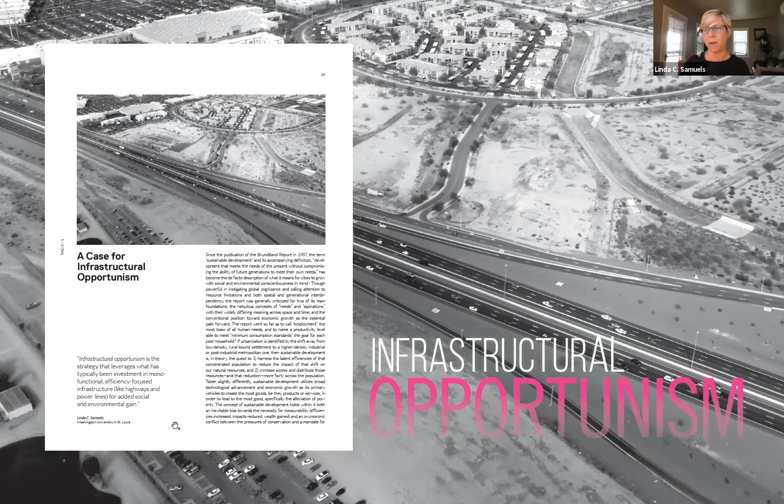So if we have these opportunities, one of my big questions is really, why are we building infrastructure like it's 1956 or even 1976 still, when it's almost 2022? We are on the verge of investing billions of dollars again in infrastructure as it continues to become obsolete, as environmental challenges intensify, as social inequities persist and widen.

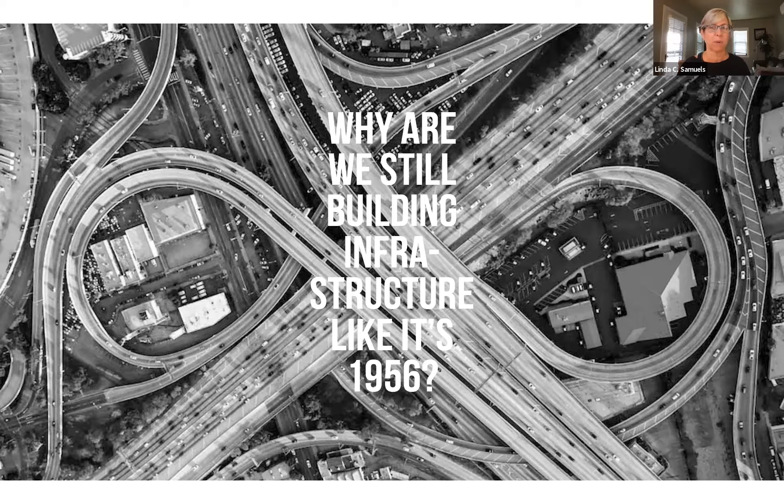And we have to design better infrastructure, but we also have to design infrastructure better. So my question is, how do we go from last generation infrastructure, which is resource intensive, spatially and socially disruptive, and almost always does one thing at a time, and sometimes not that one thing very well, to next generation infrastructure, which contributes to the reduction of these damages and divides.

It reintroduces systems-based thinking into city design. It recognizes infrastructure as a public amenity, and it utilizes all of our interdisciplinary skills as designers and thinkers, regional thinkers, macro and micro thinkers, to improve the quality of experience and the quality of life for all who use it, human and non-human alike.

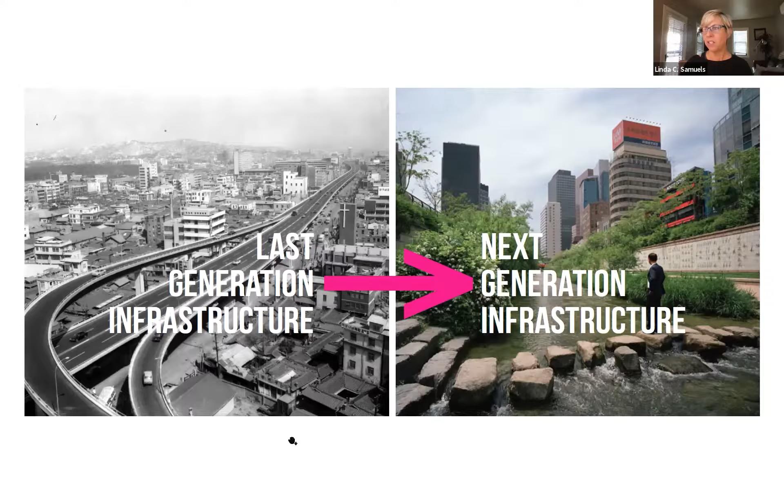So part of the book that I want to share with you today is two of the primary case studies that are included in chapter 4. And I remember that chapter because it was one of the hardest chapters to finally get done. These two case studies have pretty significant contrast in terms of geographic and demographic conditions.

One of them is the Interstate 11 supercorridor, which is the stretch of interstate that is potentially made up of a couple existing interstates with a couple new components. It's about 500 miles of proposed interstate, and it connects, in the big picture, the port at Guaymas, Mexico, all the way to Canada. So it's technically a Canamex corridor.

But the section that we looked at was really the primary focus section, which runs from the southern border of Arizona to Las Vegas. The reason that piece in particular is so important is Phoenix to Las Vegas are the two largest cities in the US that don't have an interstate connecting them because they were not large enough when the Eisenhower map was originally drawn.

The other case is significantly smaller, and it's a little bit different because it focuses more on the social aspects than the environmental aspects. That's in St. Louis, Missouri, which is in the central US on the Mississippi River. That is about 17 miles of Metrolink light rail proposal that would connect the southern part of St. Louis through central St. Louis to the northern part.

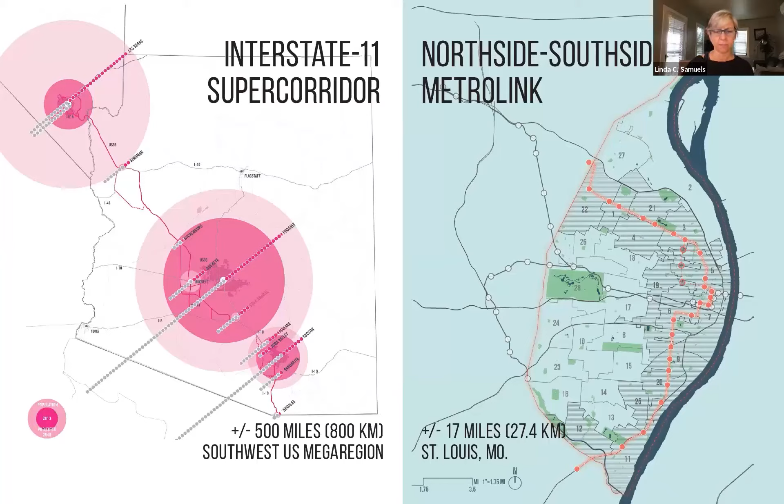So the question is, how do we actually change these infrastructure models from past models to future models, or from last generation to next generation? Sometimes I call this going from the red arrow to the green arrow scenario.

And I have thought about these three strategies. The strategies are broadening the process, transforming the prototype, and measuring what matters so that we can shift the paradigm. I want to talk a little bit about each of these.

Broadening the process is really about incorporating a wider range of stakeholders early on in the process: designers, planners, ecologists, hydrologists, people who might not be thought about in the very earliest stages of infrastructural planning. Working across agencies and really spreading power to the people who are most affected, the local residents.

Transforming the prototype is really about the physical objects. How do we stop designing these physical objects based on some sort of status quo idea of what they should be, moving away from models that are obsolete or unsustainable, and seeking bigger goals beyond efficiency of service? I think we do that by incorporating next generation infrastructure criteria.

And then measuring what matters means that we've got to stop thinking about growth as the only solution, as the only measure of success, growth for the sake of growth. We have to differentiate good dollars from bad dollars. And we have to also recognize the cost of loss.

So air pollution is a loss, and we don't account for that loss when we're talking about a bottom line dollar success. We also have to account for the value of social gains. So volunteering, working in the home, these things have never been given the kind of value they deserve in terms of measuring success.

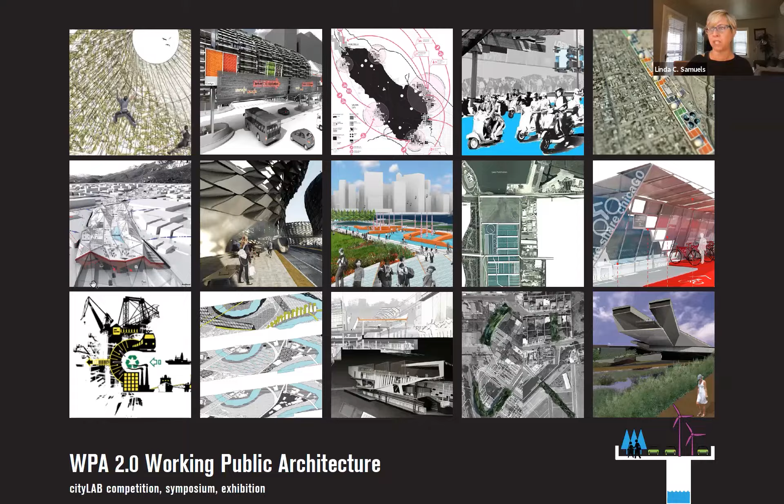This competition attracted about 320 entries globally, and I looked more specifically at the top tier, the 15 finalists and the winner. What you see here is an image from each of the 15 finalists, and these are covered pretty thoroughly in the book, and the names might seem a bit familiar if you've seen recent publications.

Almost every finalist has produced work since the competition—it's been 10 years—that had seeds in their entry to the competition. So they've taken these ideas of next generation infrastructure and are continuing to practice and expand them.

The winning project is by Port, just to give you some glimpse into the project that took the prize. It's called Tunnel Algae Park, and it was an idea that by creating a bridge across the tunnel that connects Manhattan to Governors Island, you could capture that CO2.

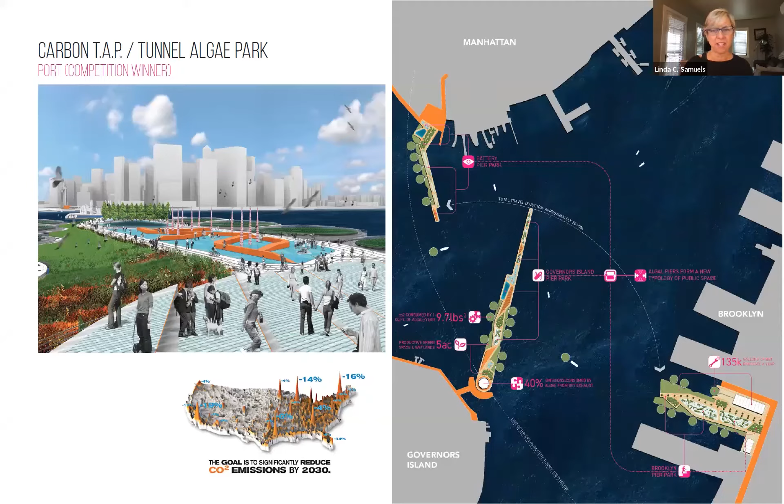You could turn that CO2 into algae, and take that algae and turn it into alternative fuels. At the same time, you would be providing public space, and you would add an option to connect these 2 parts of New York through better biking and pedestrian activity. So you can see how that begins to think about what I'm going to show you as next generation criteria.

Next generation infrastructure is multifunctional, right? It is no longer enough to invest all that money in something that does only one thing. So everything has to do more than one thing at a time, preferably with relationship among those systems.

It is public. So it is not just about public funding, but about providing public space that is inclusive, engaged, and supports difference. It is visible. Part of making our resource use more visible means that we are personally accountable for how we use resources, but we are also more accountable as a collective to how we use the commons.

Next gen infrastructure is socially productive. It increases rather than decreases equity. It provides new amenities, access, and opportunities while hopefully decreasing negative impacts. It is locally specific, flexible, and adaptable.

So next gen infrastructure can't be obsolete in 10 years or 15 years or even 50 years, but it has to be able to change over time, adapt to people and technology, and accommodate climate disasters that we know are coming. It is sensitive to the eco-economy.

So next gen infrastructure recognizes its interconnection of economic and ecological systems and prioritizes reuse, recycle, revitalize, or reinvent. It is also driven by design rather than efficiency only, so it can become design prototypes or demonstration projects, but it is an opportunity for designers to engage quality of environment, aesthetics, and actually sense of place.

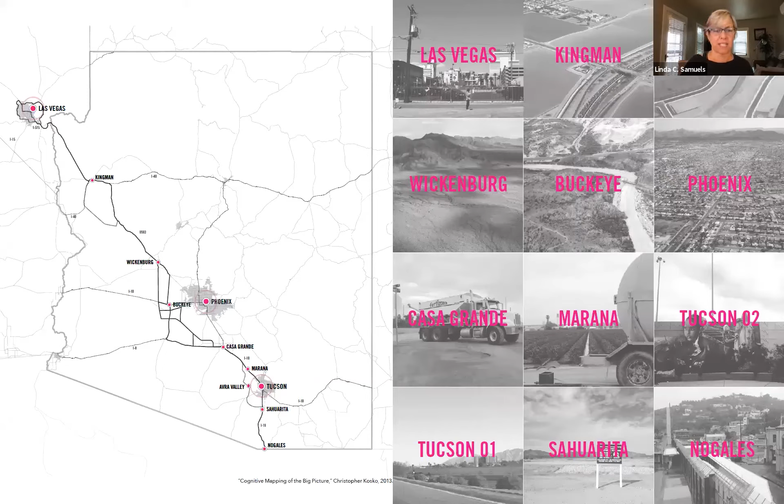One of the reasons, though, that this freeway was being proposed was obviously for economic development, but also the argument that more lanes is always necessary. We've proven time and time again that more lanes do not solve congestion, but in Interstate 11, that was a big part of the argument. So we wanted to start by debunking that argument and saying more lanes are not going to solve the problem here, and more lanes are not going to give you the economic development that you're looking for.

So we developed sort of three really basic ideas that said, okay, if you do these three things before you do even any other design work, they will offset a lot of the carbon emissions. So design for high density, multifunctionality, and multimodality along the whole route.

Second was to shift 10% of the freight from truck to rail, and that would increase inter and intra-city commuter rail in addition, according to ADOT's existing projections. And then the last one was to just shift an additional 1% of vehicles from gas to electric. And all of these things were already in the process.

ADOT was already studying these things, but we added up the numbers, as you can see on the right of the screen. Can't miss that yellow. If you just did those things, you would save 2.1 million metric tons of CO2 before you did any additional design work. That's about a quarter of the 2+ million new anticipated residents offsetting their greenhouse gas emissions. So we started there by saying, do these three simple things first.

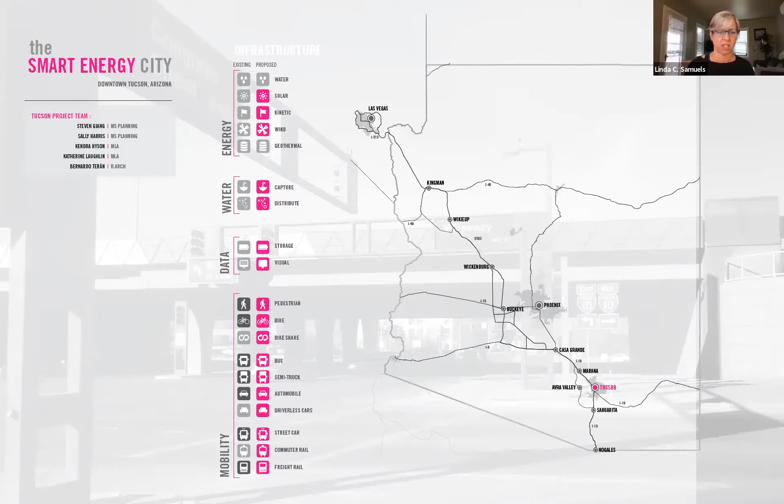The two projects I want to show you, one is this project called Smart Energy City. If you see the two columns, the gray column of existing infrastructure on the left is what is evident now in terms of resources of water, energy, data, and mobility. The column on the right, the hot pink, shows where each infrastructural resource has been enhanced through the design project you'll see. So the design project for this site was a response to the specific condition here.

A little bit of demographic information: Tucson at this time was the 6th poorest city in the US. A little over 20% of the population was below the poverty line. But Tucson is what I call an infrastructural adolescent city. It's starting to make some changes by building streetcar and enhanced transit, but it still is building large arterial roads at high speed and has a huge problem with pedestrian fatalities.

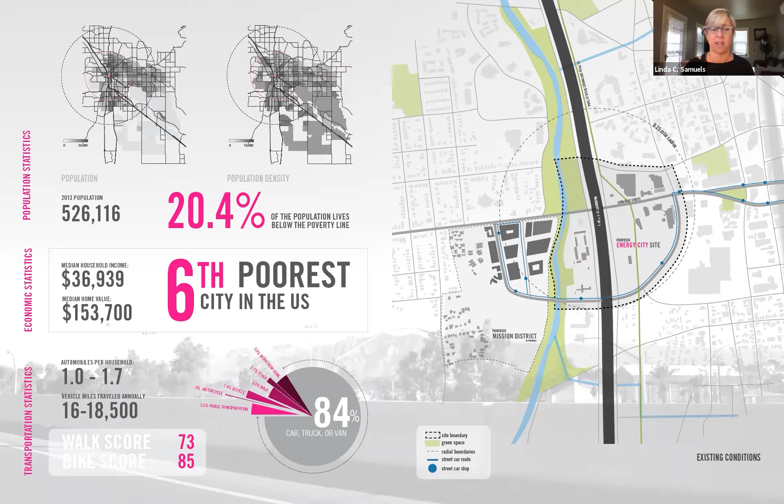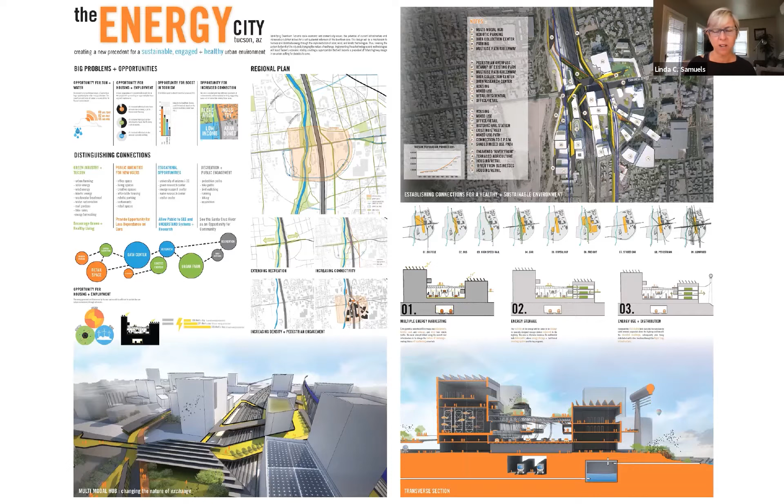So this project focused on the site where the new I-11 would intersect with Congress, one of the main streets in Tucson. The focus was to make energy, renewable energy, in every way possible. The project has a tremendous amount of solar production, also kinetic energy production and wind energy production, and utilizes that to create a new renewable energy economy.

And this connects back to the city through the new modern streetcar that was actually under construction when I was living there, and was completed and is hugely successful.

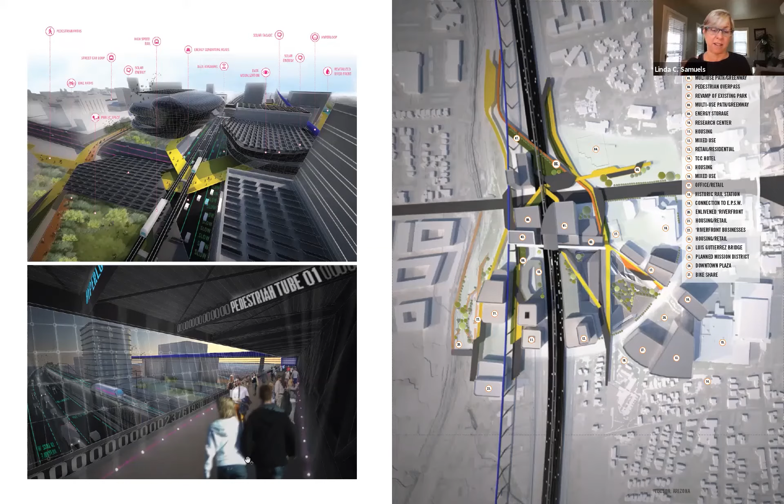It then takes the renewable energy and adds to that the idea that water is clearly an issue. So every other aspect of the project is really about harvesting water - rainfall, air conditioning condensate, any kind of water that can be harvested on the site to recharge the adjoining river and add additional animal habitat, riparian areas, and recreation space.

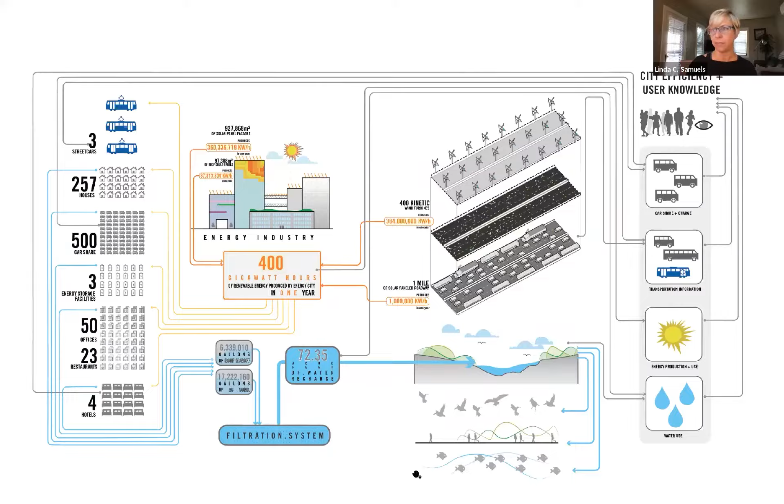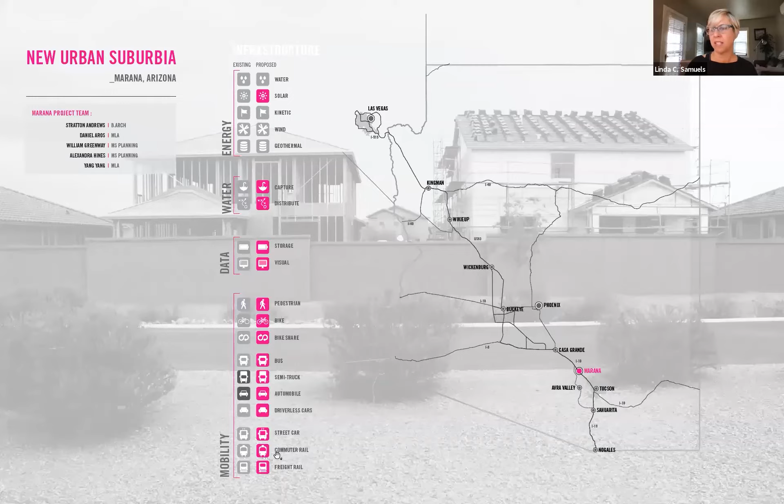The second project is in Marana, just north of Tucson, about 30 miles north. This site is a little different - it's got a slightly wealthier population, and it's located in a place where there's actually substantial water rights. This was an agrarian location in the state of Arizona, and those water rights are no longer being used for farming, so they can be utilized to create green space, public space, and greenways.

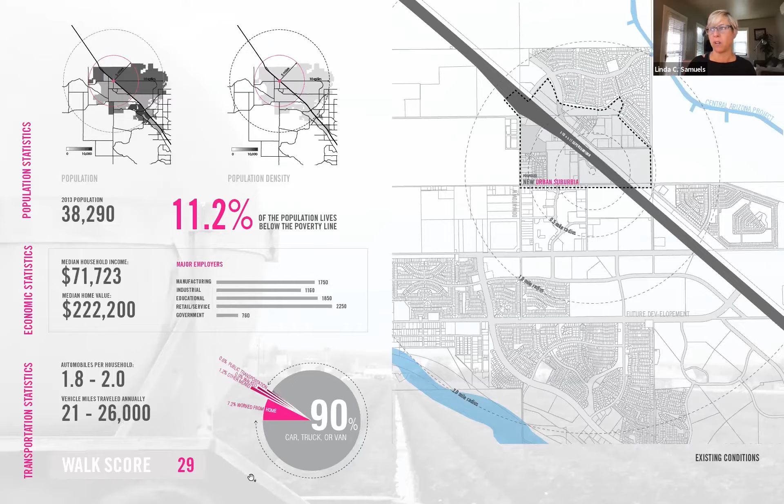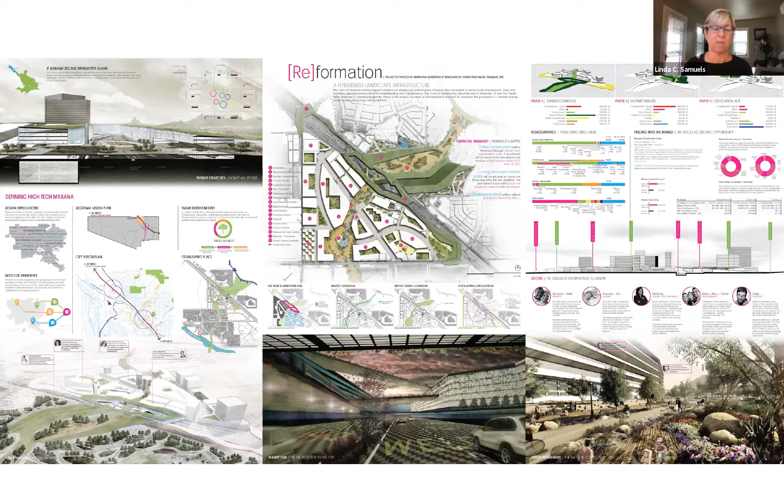So this project was much more about how you might take that green space and create a new kind of sustainable city that becomes accessible to Tucson through a high-speed rail corridor, making this a low energy, livable opportunity for people who might commute back and forth to Phoenix or Tucson.

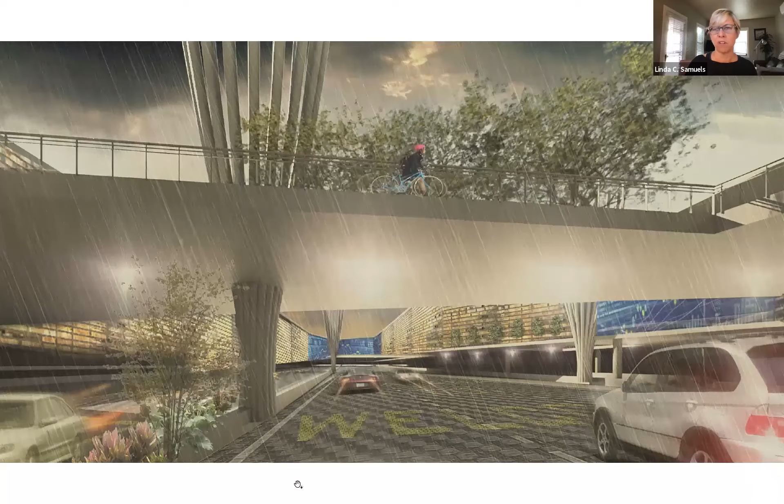And again, this project ended in what I'm calling the results diagram, and these are some renderings of the project itself. This results diagram was really about renewable energy production and water - all of the water in the project would be recycled, returned to the project in support of a public greenway.

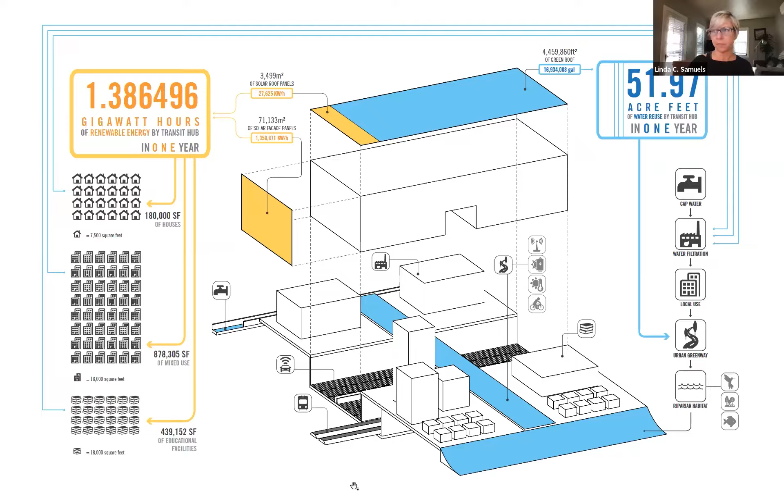And so in the end, if we go back to that original idea that 20% of the greenhouse gases are offset just by those original three ways we want to divert congestion, you then add renewable energy production, water harvesting, smart industry, multimodal options, smart transportation, protected wildlife, and greater public amenities.

And this was the argument that we shared with the Arizona Department of Transportation. Luckily, when people have asked them in the audience when I'm presenting this work, 'ADOT will never do this,' people say, and ADOT representatives are there, they say, 'well, we can't afford not to do this. The benefits are just so good.' So I'm still waiting to see if that's actually playing out.

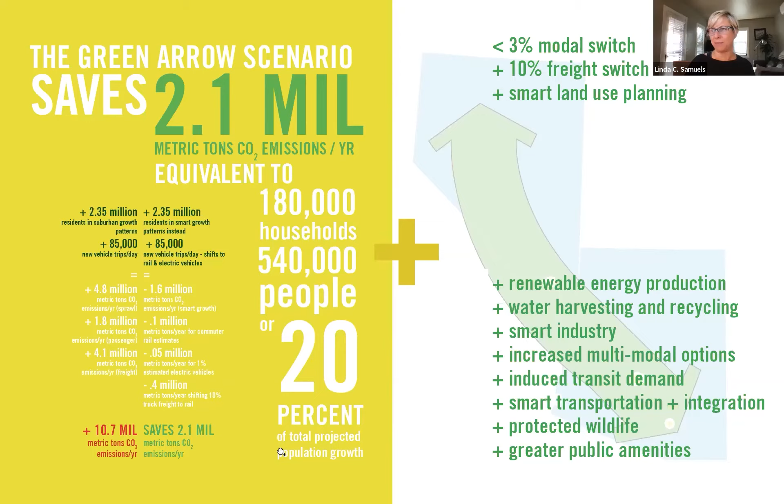The second project I want to talk about, which is really quite different, is the North Side, South Side Metrolink expansion in St. Louis. As you can see, this is an image of the Mississippi River. St. Louis is directly on the river, but I wouldn't say it's so much of a river city anymore. We've kind of turned our back to the river, as a lot of post-industrial cities have.

Similar to the I-11 super corridor, though, I'd say this is an infrastructural opportunism project. This is getting ready to have potentially millions of dollars of investment, and if it doesn't go towards something more than just a train line, we're missing an opportunity. So the grant that Jennifer mentioned at the beginning was for a project called Mobility for All by All.

And this is our team. We had organizational partners, project partners, advisors, and students. The idea was, again, how do we look at this 17 miles of light rail and turn it into something more socially productive than just a train?

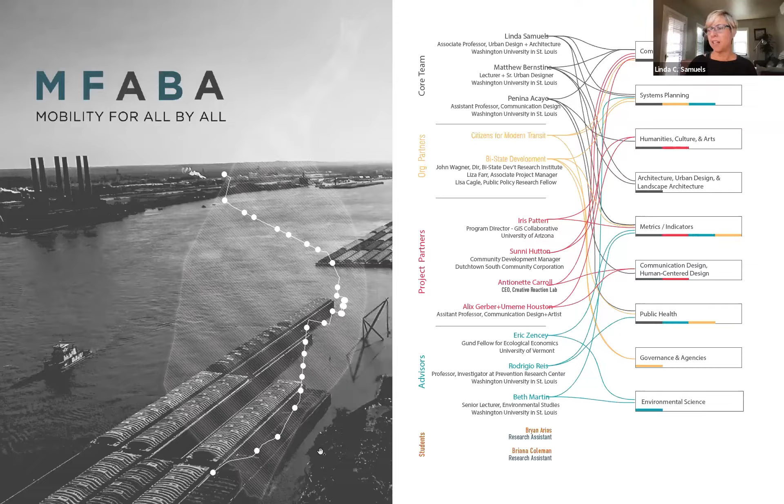Just to give a tiny bit of information about St. Louis, we looked at some demographics of the city. The timeline of the city is very complex. St. Louis reached its peak population in 1950 of 856,000, and you can see the population in 2016 was 311,000. So within the city boundary, we've lost 60% of our population in the last 70 years.

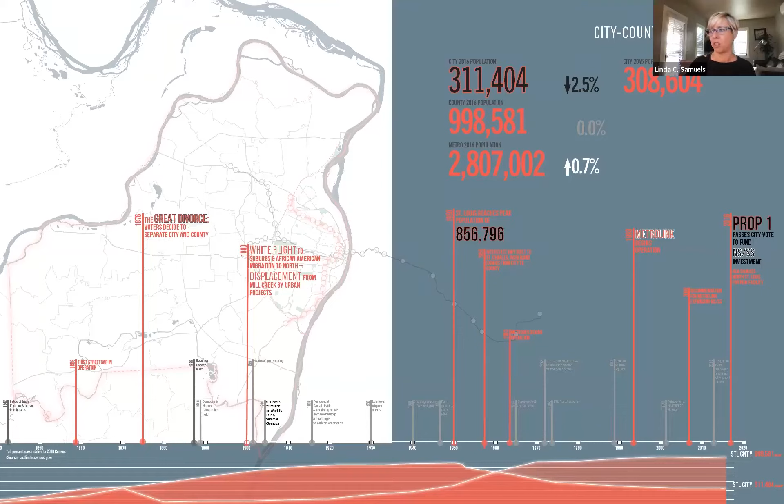The 308,000 projection was what we thought we would be in 2045, and we've already gone below that. So our 2020 census is reflecting quite a population loss. The regional population, however, is fairly stable.

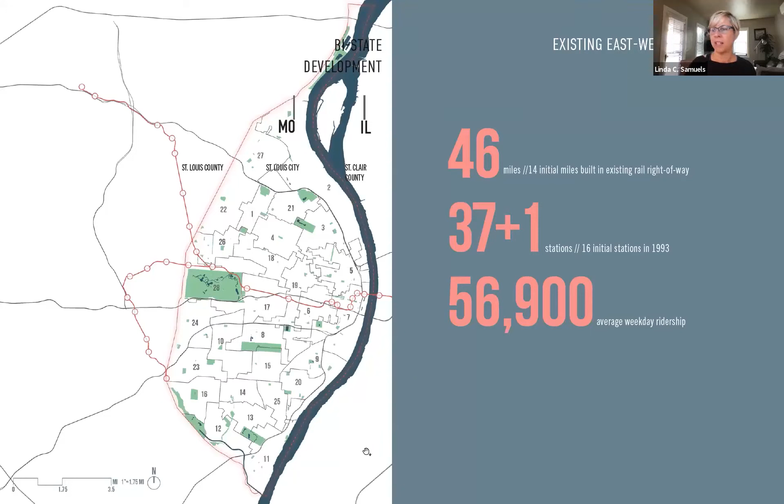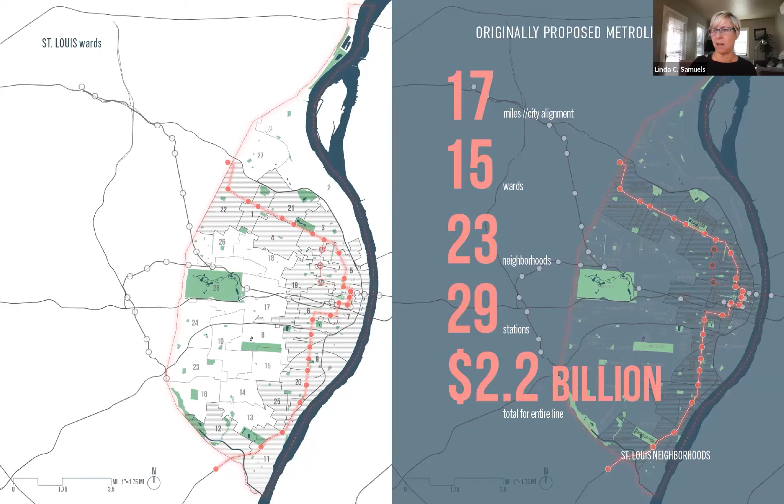So the red line that you see here is the existing east-west Metrolink. It's already about 46 miles, reaches into the county, has 38 current stations. And this red line running north to south is the newly proposed North Side, South Side expansion. About 17 miles through 15 wards, which makes it kind of a political nightmare, 23 neighborhoods, 29 stations, and up to $2.2 billion of investment.

It is directly adjacent to the old Pruitt-Igoe site. If you're not familiar with Pruitt-Igoe, it's one of the most notorious housing projects built in the United States. It was imploded beginning in 1972, and that site sat vacant for the last 50 years.

When I arrived in St. Louis, it was a natural growth forest. It has been the site of racial violence for 75 years, if not longer.

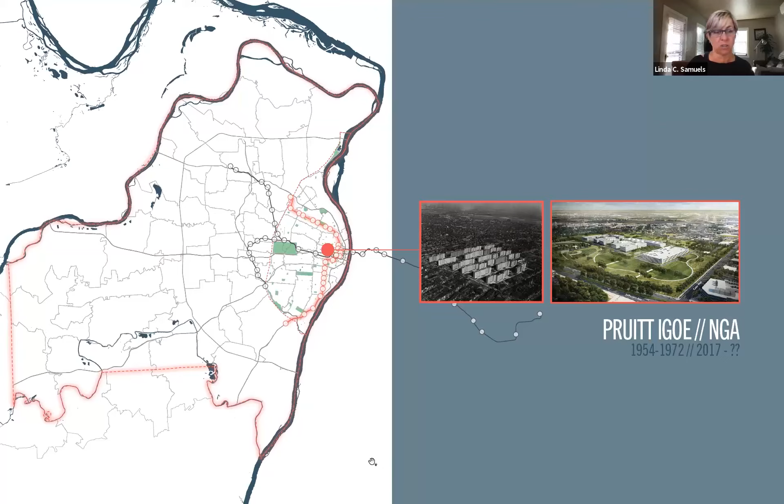This North Side, South Side line connects to that, and it is again a site of contestation because this new National Geospatial-Intelligence Agency project is being built on the site directly next to it. I'm not going to talk about that much, but it gives you some sense of where this is in the city and how it plays into the sort of national imagination of racial discrimination.

So the north and south side of St. Louis—this is a little bit of demographic information showing you why this is really a line of social equity. The northern side of St. Louis is 98% African-American, with 42% of households at or below the poverty line. Median household value is low, and it's a low vehicle area. So not only is this a population suffering from generations of institutionalized racism and disinvestment, it would really benefit from this opportunity to connect to jobs and other opportunities.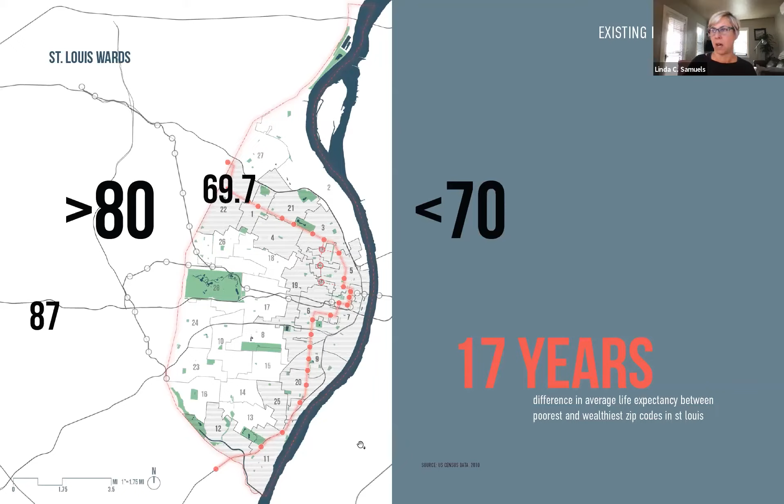So if you look at, I'm going to point out just one site. So the Pruitt-Igoe site is right here, and the NGA site is right adjacent. So those properties have gone through generation after generation after generation of kind of urban renewal and segregation.

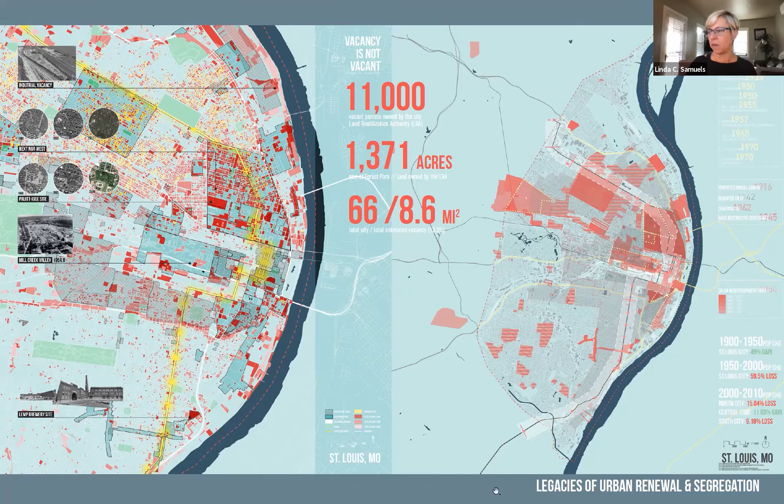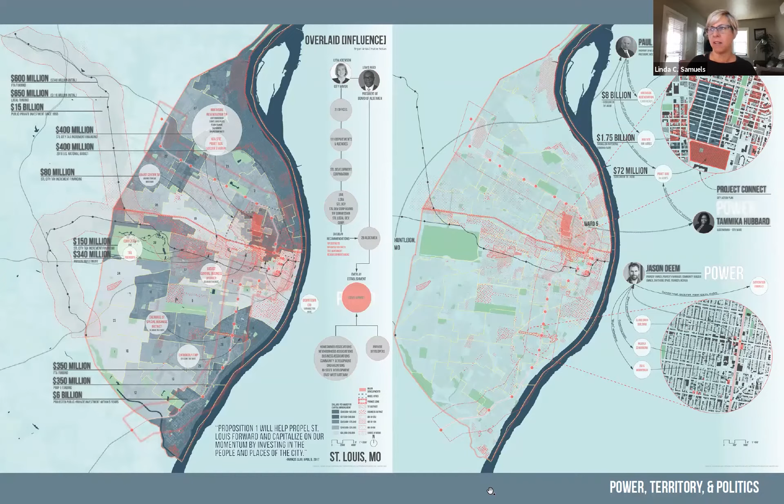We mapped the power, who has control, who's in charge politically, who owns the property, what are they doing with it. We looked at environmental justice questions.

So being a city on a river, being places that have flooding, if you have a combined sewer and stormwater, you know that when that stormwater backs up, it means that you might get sewage in your yard or in your house as a product of that backup. So these are potential opportunities where federal funding might be utilized for better engagement and more design work.

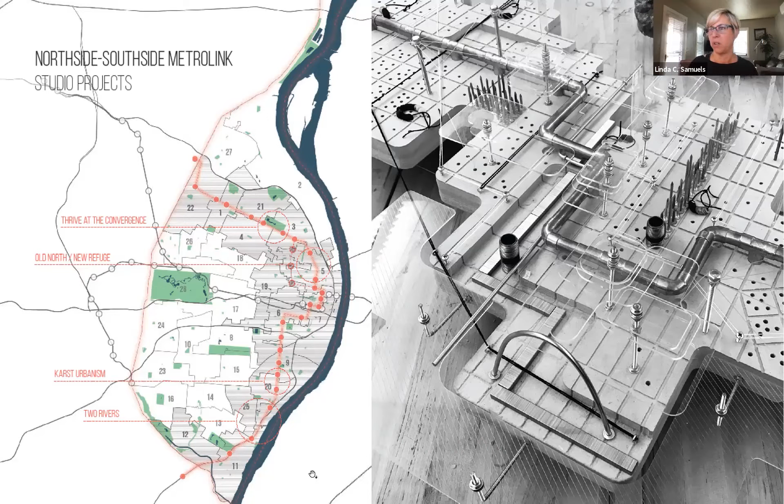So we use this mapping as a way to begin to select our project sites. And the 4 project sites you see selected on the left with circles are the projects I want to show you. And we scattered them throughout the north side of the city and the south side of the city. I'm kind of going to go north to south. I'm just going to cover these briefly.

The Thrive at the Convergence project was really about where this new north side, south side Metrolink line would intersect this historical neighborhood of the Ville. Many famous African-American cultural and sports people who are known all around the world were born in the Ville. And the Ville is really a location that has suffered from this disinvestment on the north side, but it has so much history, so much cultural significance. So this project was really about how do we bring that cultural preservation and historic preservation to a bigger audience.

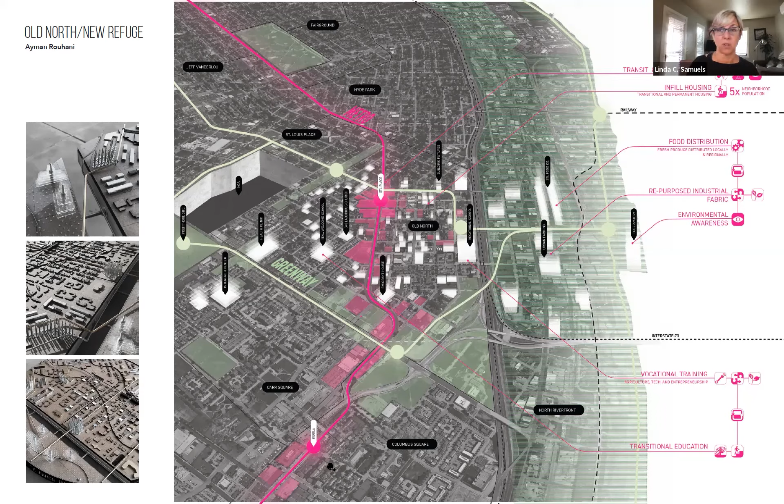Old North New Refuge was a project about utilizing the north side, south side line as a way to serve refugees. St. Louis has quite a large international population and is very open and welcoming to refugees. So this would be a way to connect services. We have a neighborhood like this on the south side where we have an international institute that provides language services, housing services, food services, job training, and this would be a similar version inspired by investment with this north side, south side line as a way to connect people through transit.

The Karst Urbanism project capitalizes on this idea of the karst landscape, which is sort of the cave, the underground cave landscape in St. Louis. It's why we're a famous beer city. Before there was refrigeration, Anheuser-Busch would store all of their beer in the caves underneath the city. And this project uses that ecological structure as a way to create a water landscape and a new water economy in a South Side neighborhood.

And then Two Rivers is a project even further south where they're using shipping containers to store contaminated soil, revitalize that contaminated soil, and then create food production as part of the re-energized aspects of this particular neighborhood.

So you can see how we're using the next generation criteria. And even in some cases, we're trying really hard to put a quantifiable number with that next generation criteria. How much stormwater can we capture? How many people can we feed? How much density can we increase? And even if this is a little speculative, it speaks to the language of people who would potentially invest in these projects and government officials who are going to have to argue for why these projects are valuable.

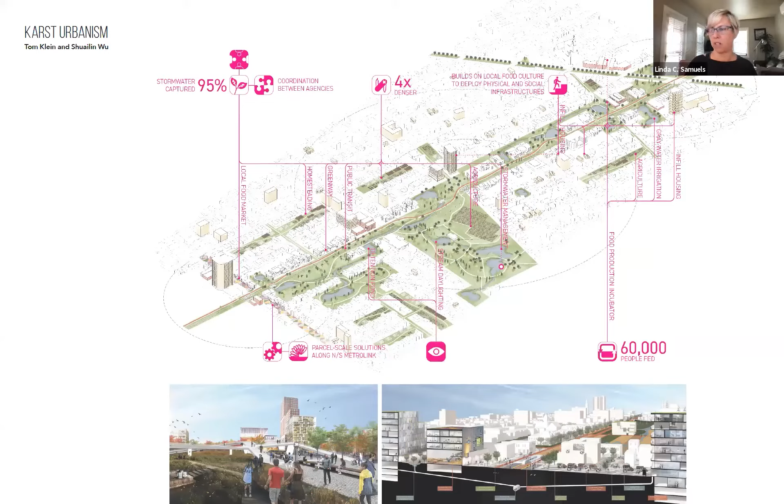So we're broadening the process, and I'm not going to talk about that as much, though we've done a lot of work around engaging arts organizations and youth in having discussions around what they want from transit and how they can speak up as residents. Those projects are about transforming the prototype.

And lastly, I want to talk about measuring what matters, because I think this is really significant to all the work that we do. I want to talk about this in two ways: measuring things that we think are immeasurable, and shifting away from the standard ways that we have measured success in the past. So the second first—if you're familiar with GDP, which is typically the way that we gauge success as a country, right?

Gross domestic product is the total monetary or market value of all the finished goods and services produced within a country's border in a specific time period. And the thing about GDP that has been criticized from the very beginning, from its invention, is that it measures all dollars, regardless of if they are good dollars or bad dollars.

And GPI, Genuine Progress Indicator, is a concept that emerged out of ecological economics, which says economics is not the big umbrella under which ecology lands, but ecology is the big umbrella under which economy lands. GPI tries to solve some of the problems that GDP puts forward.

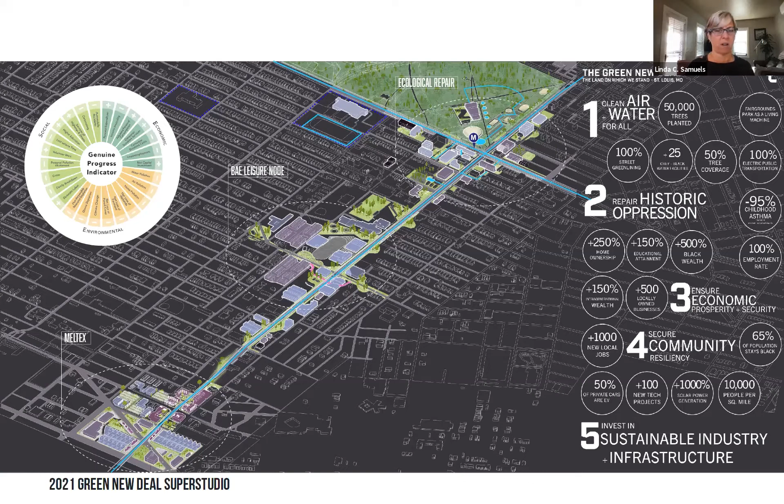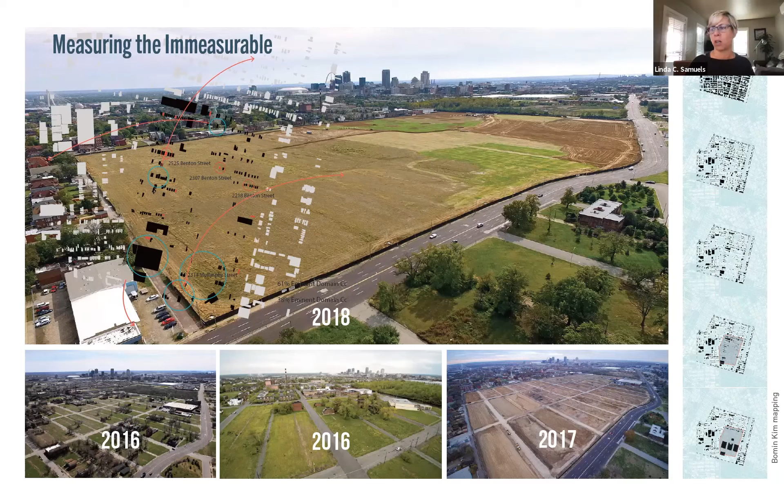So we know that the original 11 criteria I've presented, the next gen infrastructure criteria, are significant, and they're going to help us move forward toward a next generation infrastructure world. But we also know that benefits and opportunities in our infrastructure are not equitably distributed. We were reminded of this again this last summer, a year ago. This idea that we are still reckoning with uneven and highly contested production of the spaces we live in.

Infrastructure is often one of the largest offending products of that uneven distribution. So even though we might be boldly and visibly taking back space in the name of marginalized and excluded populations, it is valiant, but it is only step one.

So by measuring the immeasurable, we have to take into account that damage, but we also have to incorporate steps to somehow make amends. Before the book was published, I started to think about what must be included in the next generation infrastructure to contribute to this idea.

And I believe that next generation infrastructure must also repair the damage that's been done and the violence that's been caused to populations, human and non-human, and communities that have been oppressed, abused, or erased from the lands where we hope to build. So I added a 12th criterion.